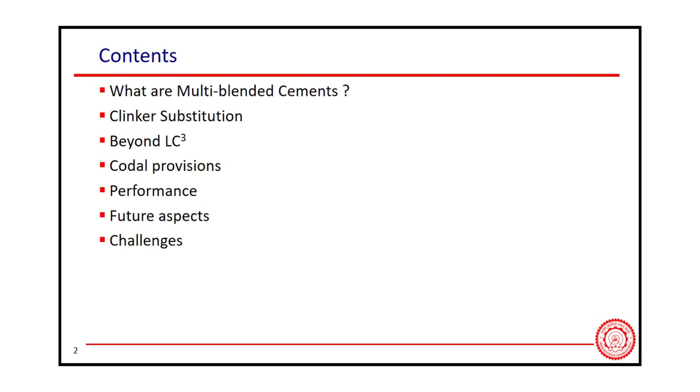So let's talk about the potential of multi-blended cements. This presentation includes what multi-blended cements are, clinker substitution, beyond LC3, codal provisions, performance, future aspects, and challenges.

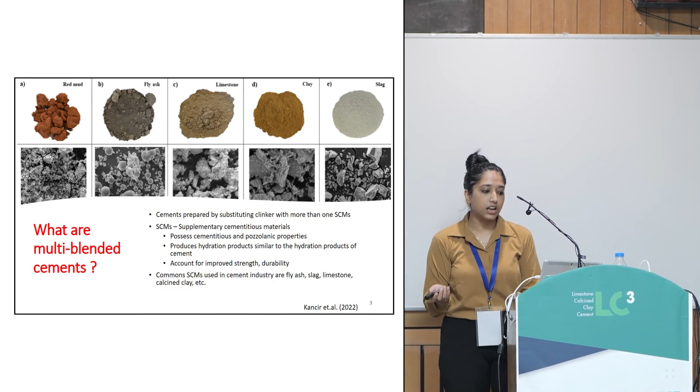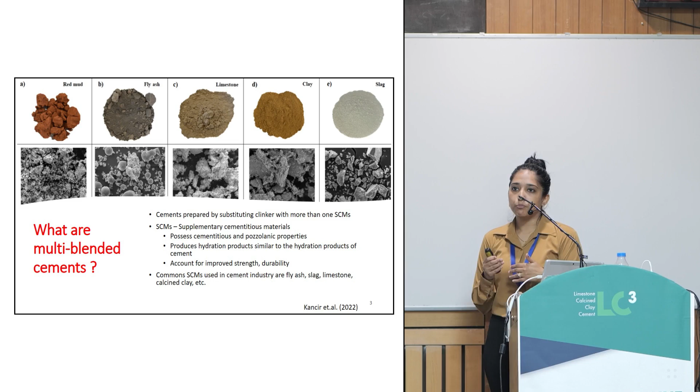Let me brief you about what multi-blended cements are. Basically, these are cements prepared by substituting clinker with more than one SCM. SCMs, or supplementary cementitious materials, are materials which possess hydraulic properties, pozzolanic properties, or both. Some commonly used SCMs are fly ash and slag. When these are used in a cement system, they improve strength and durability.

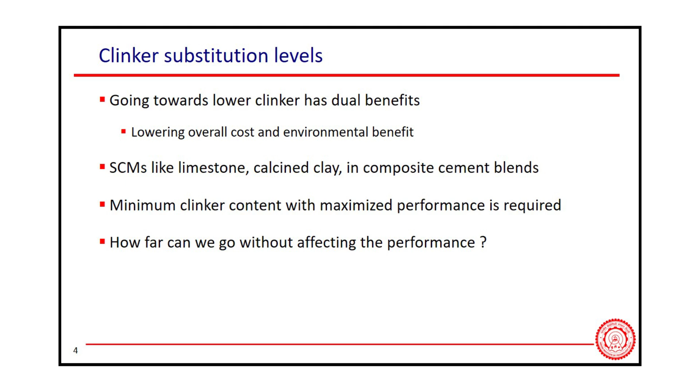So let's talk about clinker substitution levels. A lot of work has been going on towards low clinker cements. Why is it? Because of course it has many benefits, the environmental benefit being a major factor, and overall lowering of cost is also a benefit.

So what we do is use SCMs in order to substitute the clinker factor. But our major concern nowadays is, can we minimize the clinker content and achieve maximized performance? If yes, how far can we go with that? How far can we go with clinker substitution without affecting the performance?

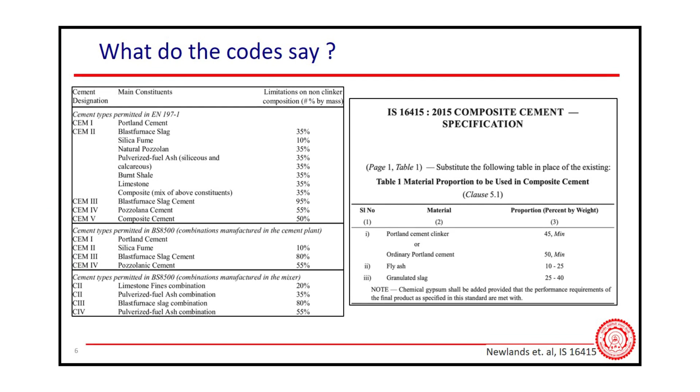So what do our codes actually say? Here you can see the codal provisions of European Code 197 Part 1 and also the Indian Code for composite cement. Here you can see the limitations on the non-clinker composition, especially with slag cement. We can go to larger levels of clinker substitution, but when we go towards other SCMs, the substitution level is fairly low. A similar case can be seen in the composite cement code in the Indian standard as well, where the minimum clinker content is 45%.

Actually, these mixes have been tailored for specific mixes. We have to explore a lot of new ideas when we try to develop new low clinker cements. So performance analysis is actually required when we make new binder systems or new cements in order to gain acceptance.

So I have been talking about performance. What does performance actually mean? Is it just strength? Well, strength is an important parameter, especially when we consider the marketing scenario. For the market, strength has always been a major concern. However, durability is also important.

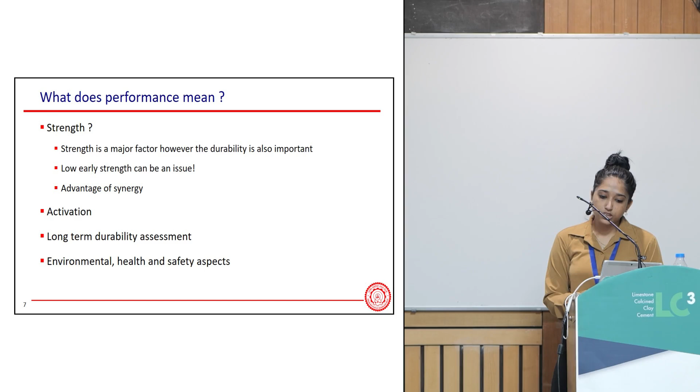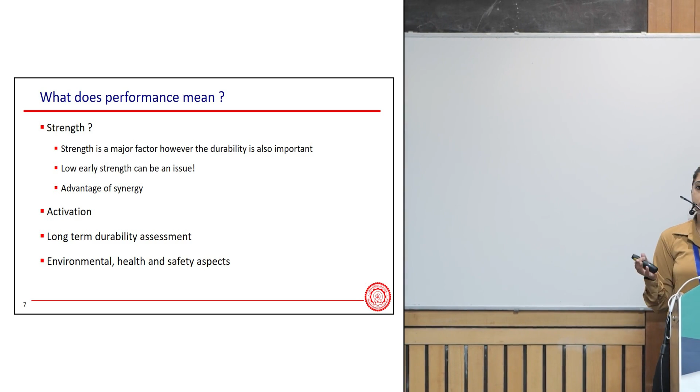What can we do? We have to focus on the binder content. Whenever we try to develop new cements, we might face issues like activation or early age performance. We have to work on that. Not just that, we also have to work on overall durability, because the long-term durability assessment will help us get a better service life, a better lifespan of the structure. Last but not least, environmental health and safety aspects are also fundamental performance parameters that have to be included in order to gain acceptance.

So, future cements apart from LC3. We all know that Western countries are more focused on going carbon neutral. They want to reduce carbon emissions, so they are shutting down thermal and steel power plants. But is it the same in India?

Well, with the shutting down of these steel and thermal power plants in Western countries, there is going to be a shift in demand. And India has a greater potential to satisfy these needs. A large amount of slag and fly ash is being predicted to be produced in India.

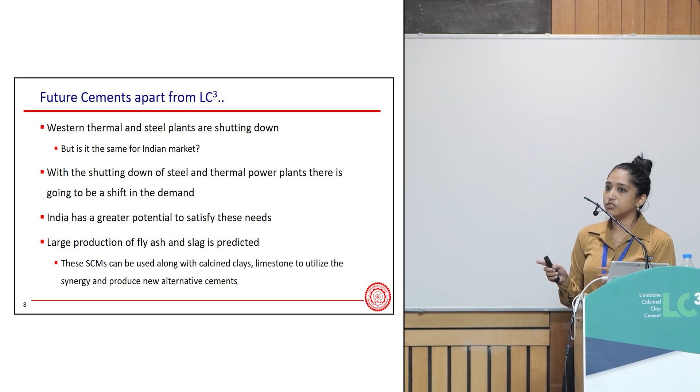We can use fly ash and slag and combine them with calcined clay or limestone to make new cement. We can take advantage of the synergy of these materials to make a better cement.

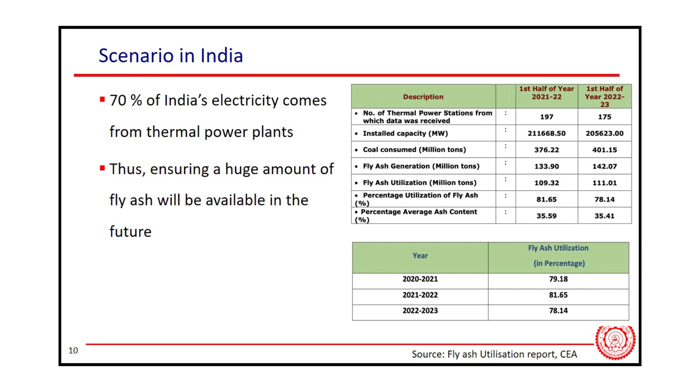In India, majority, like 70% of India's electricity comes from thermal power plants. With the growing population, the need for infrastructure, and rapid urbanization, this is not going to decrease, which gives us a huge amount of fly ash that will be available for future use.

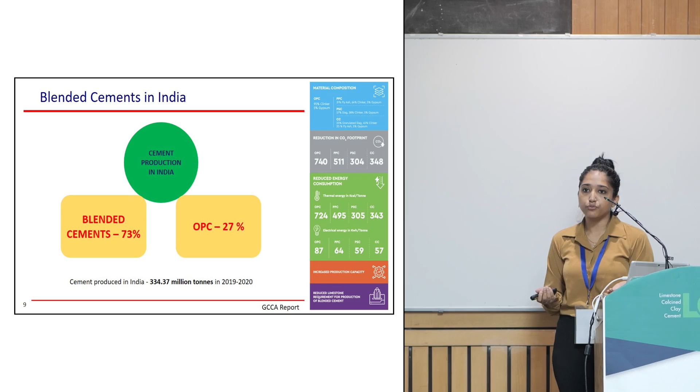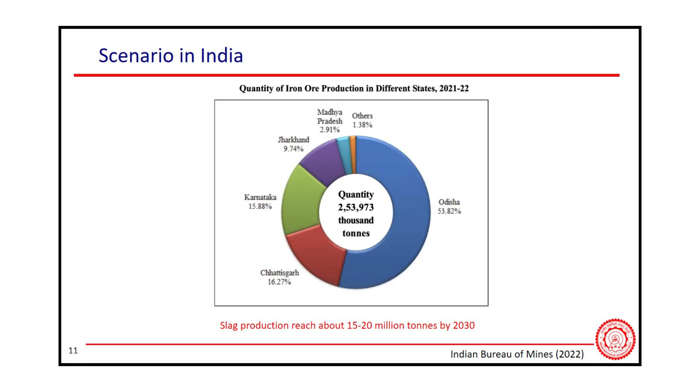A similar scenario can be seen with slag as well. Around 15 to 20 million tons of slag is going to be produced by 2030 in India.

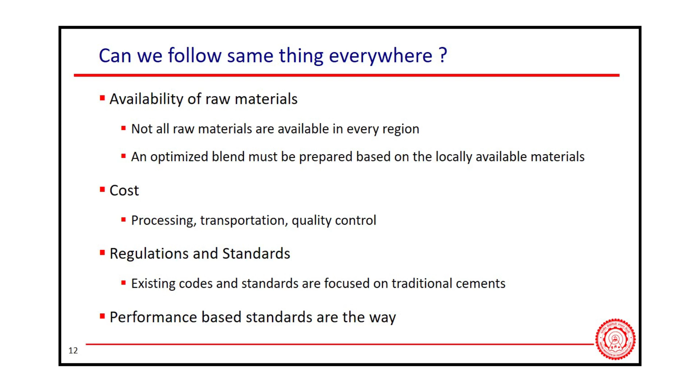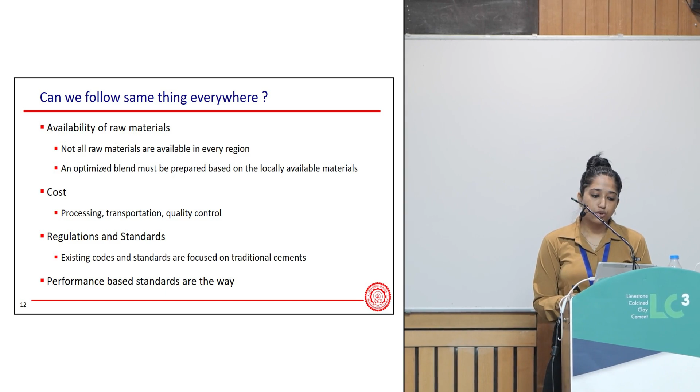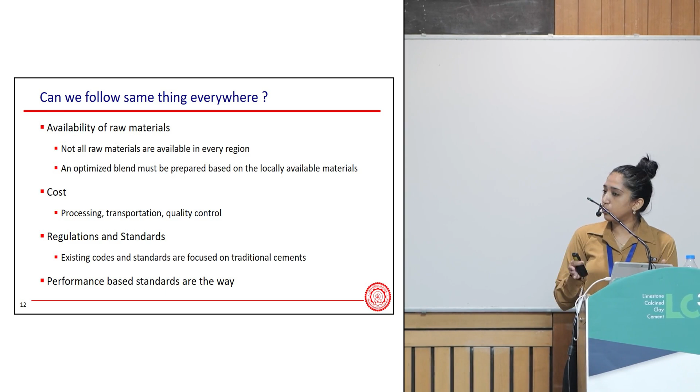But once you have all the raw materials and have developed a new clinker, can we follow the same thing everywhere? If I'm making a cement in Delhi, can I do the same thing in other places like Mumbai or Bangalore? Well, that depends on various parameters, and the major one is the availability of raw materials. Not all raw materials are available in every region. So we have to make one optimized blend based on the raw materials actually available in the local regions, otherwise that will affect the cost.

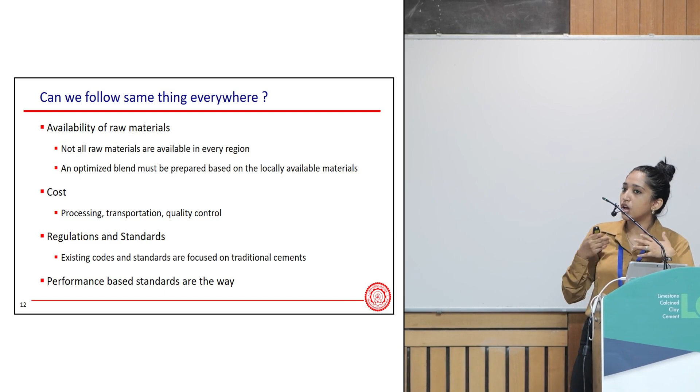While developing a new clinker system, it's not just raw materials. We also have to deal with processing, quality control, and transportation. This will also affect the overall cost.

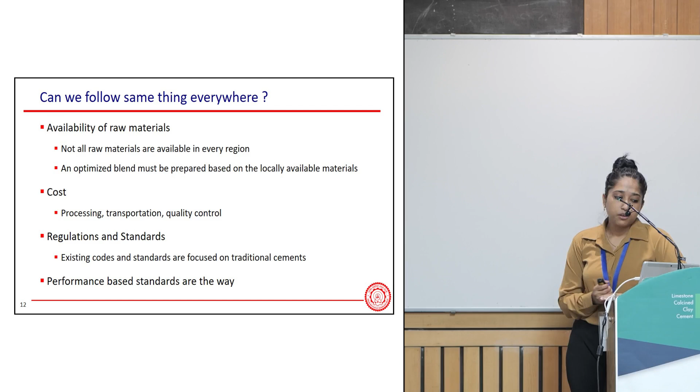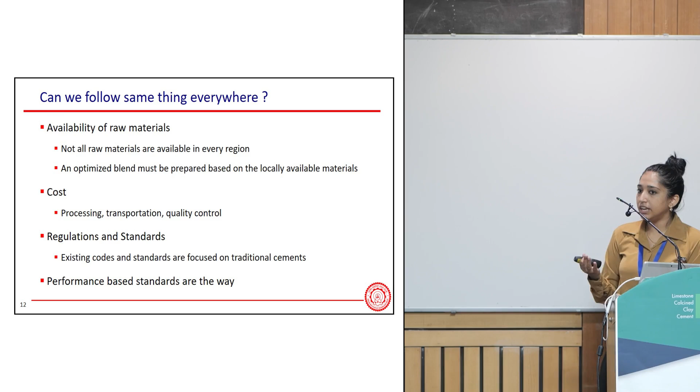Suppose you got through the above two parameters, but still, regulations and standards are one of the major things, because our standards are mainly focused on traditional cement. They don't focus on other new binder systems. Our only way is to make performance-based standards that will help us gain acceptance when we make new binder systems.

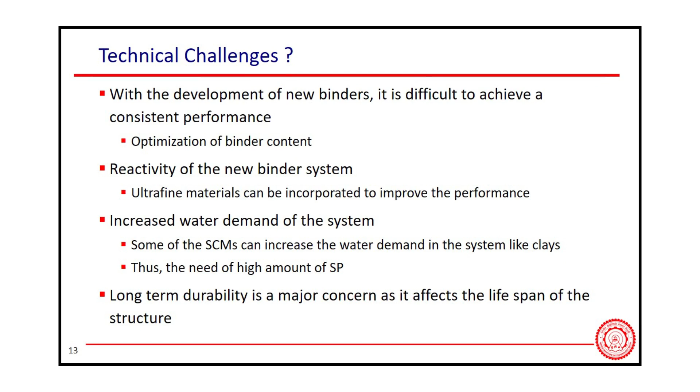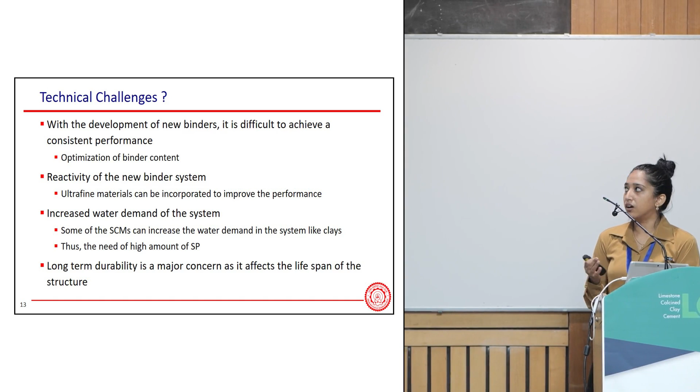We are going to face technical challenges with the development of new or different binders; it is actually difficult to achieve consistent performance. So what we have to do is optimize the binder content. We also have to work on the reactivity of the system. We can incorporate ultrafine materials in order to improve the reactivity.

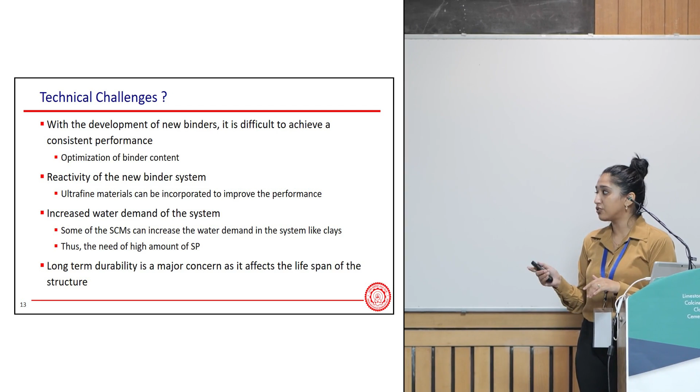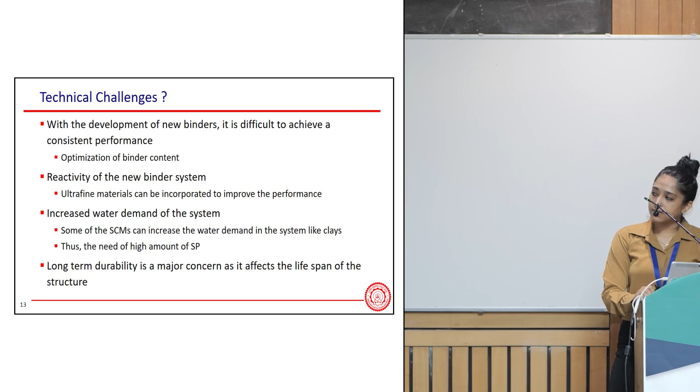Sometimes, especially in calcined clay, the water demand increases, which gives rise to a high need for superplasticizer. At last, long-term durability has always been a major concern. Long-term durability results are really important in order to assess the service life of a structure.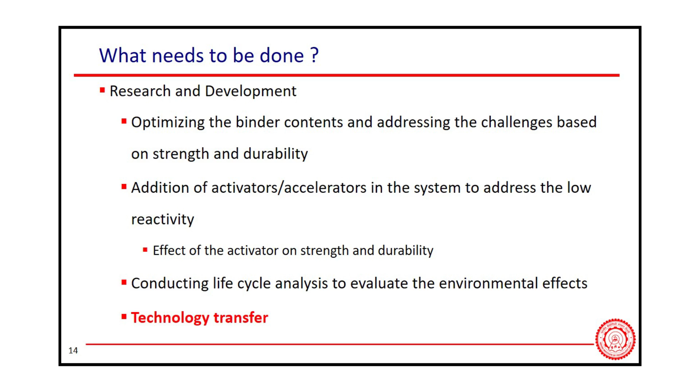Well, what needs to be done? Of course, we have to invest in research and development, because optimizing the binder content will help us address the challenges regarding strength and durability. We have to study whether we want to add activators or accelerators to the system, in order to address the low reactivity and see its effect on strength and durability.

Apart from these, we have to conduct life cycle analysis in order to evaluate the environmental effects of the new binder we are going to produce. But last but not least, technology transfer is really important, as it will help us overcome the challenges and accelerate the adoption of the new binder system in society as well as in the construction sector.

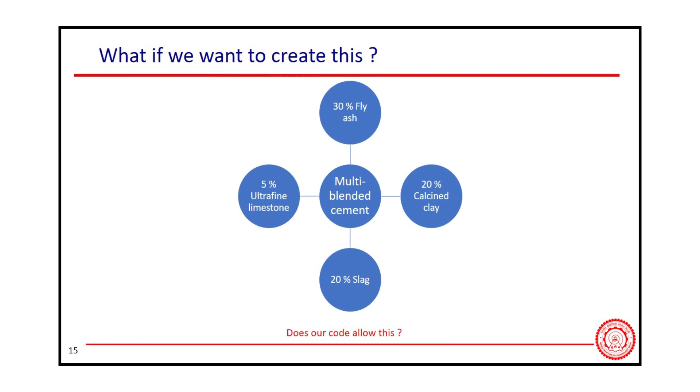Well, I would like to conclude by showing you this. If suppose the cement that we saw previously consists of 30% fly ash, 20% calcined clay, 20% slag, and 5% ultrafine limestone, will our codes allow us to make this cement? Well, this is something we should think about before moving on to performance-based standards.